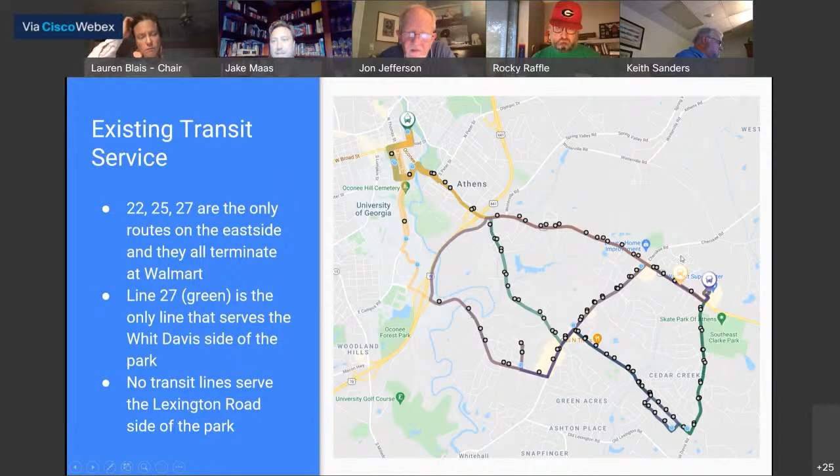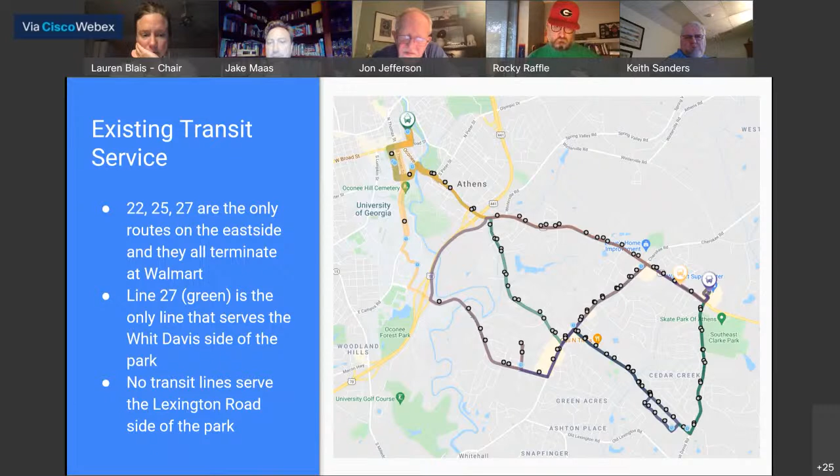So these are the current existing transit services. You can see that these are the ends of the lines. One is here on Lexington, one is at the Walmart. The green line and this purple line are both at the Walmart. Line 27, the green line, is the only line that serves the Whit-Davis side of the park, and that comes every 30 minutes. No transit lines serve the Lexington Road side of the park.

Which of course is also an important polling place for the east side, it's where I cast my votes. We are also proposing a roundabout, an improved facility at the corner of Lexington Road and the tennis court entrance. We'll talk a little bit more about that later, but that's the second element, because right now that intersection cannot accommodate buses. It's a 55-mile-an-hour speed limit, buses would be turning into that traffic, and it doesn't have the width to accommodate buses safely.

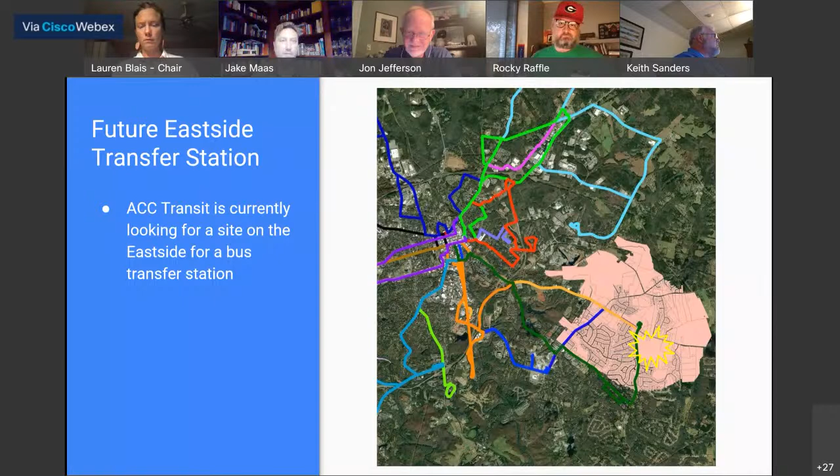And so transit, using Southeast Park as a hub for East Side transit, would allow expansion into the East Side neighborhoods and rural areas, as well as expanded service to all of the facilities that are destinations on the East Side, including a potential future library and other amenities in Southeast Athens.

This project would close the equity gap by increasing accessibility to people of all abilities and backgrounds. People come from all around to this park, yet many people in our own community have limited access. It would also provide access to the skate park, and utilizing it as a bus transfer station would create opportunities for more neighborhood use of transit, more transit routes.

It supports 13 of the 14 project criteria. Obviously, the main one we're looking at is increased usage of the transit system and better pedestrian access to transit facilities. Alternative transportation is an element, and then, of course, all of the environmental impacts you get from more people riding transit as opposed to driving.

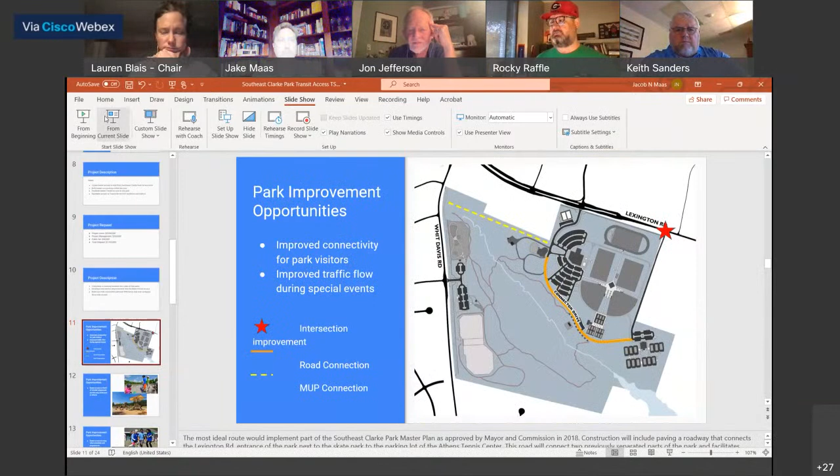Yes, it is. So I think you answered my question already. Would there be opportunity to make more of a connection to the tennis center for the purpose of voting? I serve on our board of elections, so that's something that's important to me, actually.

Daniel, what are your thoughts? Absolutely. Aside from just being able to park at that main left parking lot in the center of the park, the main Lexington side, and then there's the tennis center parking lot, and then there's the right Whit Davis side. So there's kind of three main entrances to this park that are all separated from each other. So aside from bringing access, having additional parking, there's the increased access via transit.

Right now, transit can't really come to the park because they can't get back out on Lexington Road. And that's why the intersection improvement is so important, so that the buses can get back out, and then that can kind of be here. So you could have a bus stop at the main part of the park, and then you could have a bus stop at the tennis center.

I'd like to see some way for the bus to get closer to the tennis center if that's an option, but thank you.

Yeah, the bus would travel down that orange line that you see, and so they would actually go right in front of the tennis center, and then exit by that church there on the right, out to Lexington. And the yellow line is the multi-use path. That would provide pedestrian access between the two halves of the park - smooth, level pedestrian access. Not everyone likes to hike through the woods.

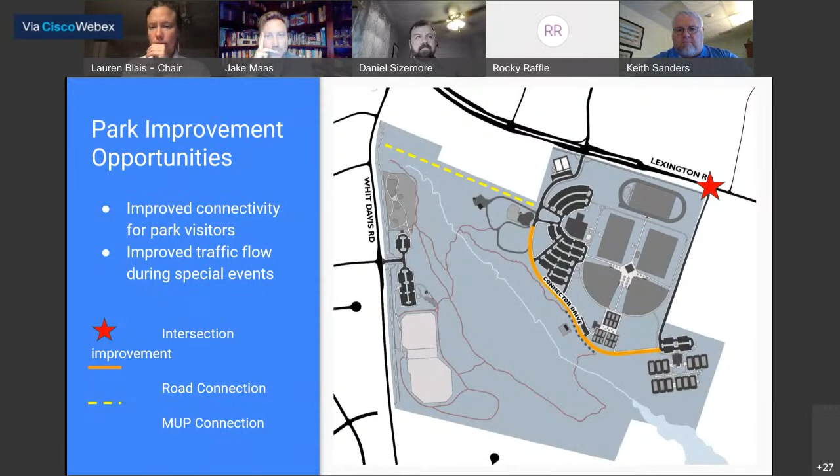Daryl. Yes, I had a question. You was talking about Walmart, and you saying the unsafety of the patrons there. I'm asking, what is Walmart doing to make sure that the patrons are safe coming through to get to these areas? If they coming over to the store, because I know it's a lot of people in them areas, mostly walk or catch the bus to the store. So what is Walmart doing to ensure safety on their property, that nothing happens to those people by the time they get on their bus or go across the street or to the park? You understand what I'm saying?

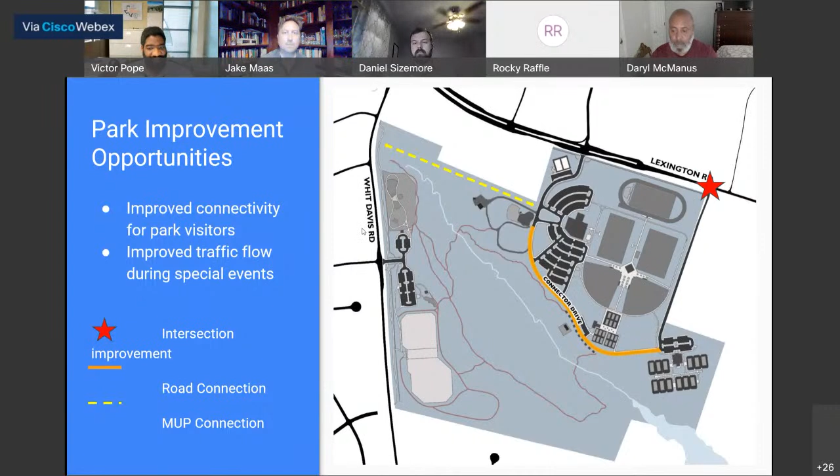Yeah, Vic, do you think you could speak to that? Sure, yes sir, that is a great question, and that's one of the reasons why we're looking to possibly relocate that bus stop from the current position, if space is available elsewhere within the property occupied by Walmart. Generally, parking lots incur a lot of pedestrian conflicts just because you have people parking their vehicles and exiting the vehicles and heading into the store, and you also have people who are reversing their cars to exit the facility as well. And just the general nature of that activity creates great possibility for pedestrian vehicle conflicts, increasing the likelihood for injury to pedestrians who are trying to use transit facilities.

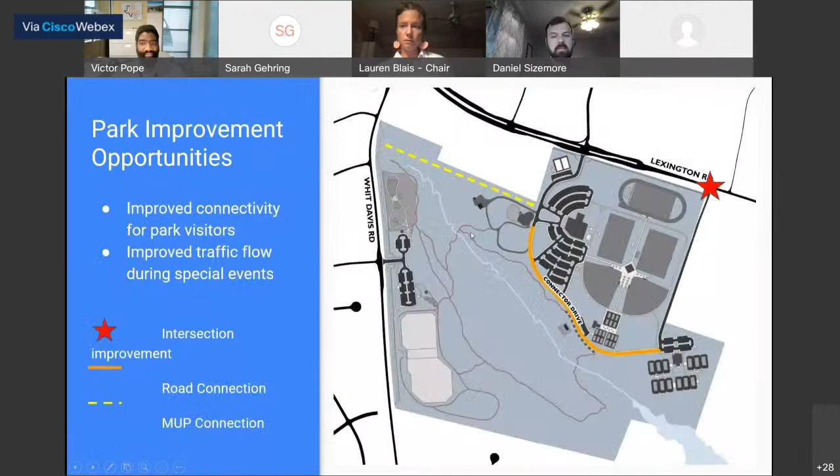But as far as the map goes, if you go down to the one with the aerial background and all the different colored bus lines, that map is literally a screenshot from the public input materials for when they were looking at site selection. One of the major benefits with this site for that transfer station being here is you don't have to acquire land, which is one of the main concerns. You know, is the landowner going to be okay with selling, or how do you pick a site for that kind of thing?

Okay, thank you. All right, we have just under a minute, so Dawn and then Teresa quickly after her.

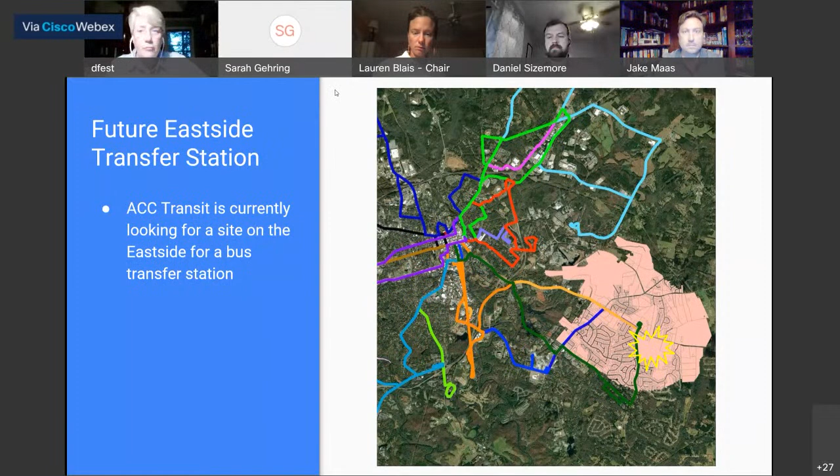Thanks, I think this is a great project. I live across the street, so obviously I'm interested. I guess I'm curious about deciding the roundabout. I don't know how you go about deciding this, but it seems like a roundabout is very expensive compared to if you put a light there at what I call the tennis entrance exit, where the church is. Would that not be a less expensive way to start this transit location?

Absolutely, I'll take that one since it's transportation based. The roundabout idea, that's a GDOT roadway, so it has to fall within certain counts to justify a traffic signal. That being said, I think if we were paying for it fully with local dollars, you're much more likely to see them say we could do that. The roundabout idea was, hopefully, you know, I think GDOT in general really likes those a lot more. It also creates a kind of gateway entrance into Athens, and there's some traffic calming that comes along with it. But the roundabout was priced out at about 3.5 million, and the signal for that location, if I remember correctly, was 1.2.

So that would cut down in costs. And we do plan on putting forth an alternative that you guys can take a look at, which would include downgrading that to a signal.

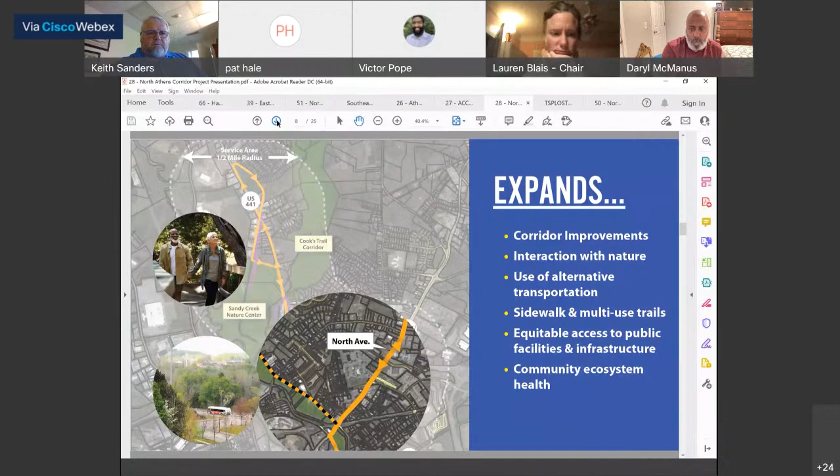The multimodal transit ride, hike, and park facility is designed to be convenient for commuters coming into Athens from outside areas, as well as residents who live along the north side corridor and may find issues finding parking in the downtown area, on campus, or elsewhere where they may seek employment or enjoy social activities.

This meets the strategic goals brought forth by providing or extending transit service to unserved areas throughout Athens.

Provide equitable access to Athens-Clarke County parks and amenities.

Connect North Athens residents with Cook's Trail through the use of multi-use pathways and connections to the Athens transit system.

Promote sustainable living through the deployment of zero-emission vehicles and renewable building materials in the multi-use pathways, and also reducing the potential greenhouse gas emissions from commuter traffic.

It reduces travel times spent in vehicles when entering or exiting Athens-Clarke County through the north side, through the use of transit and multi-use pathways. It also subsequently reduces roadway infrastructure maintenance needed for those roads, which is a further cost savings.

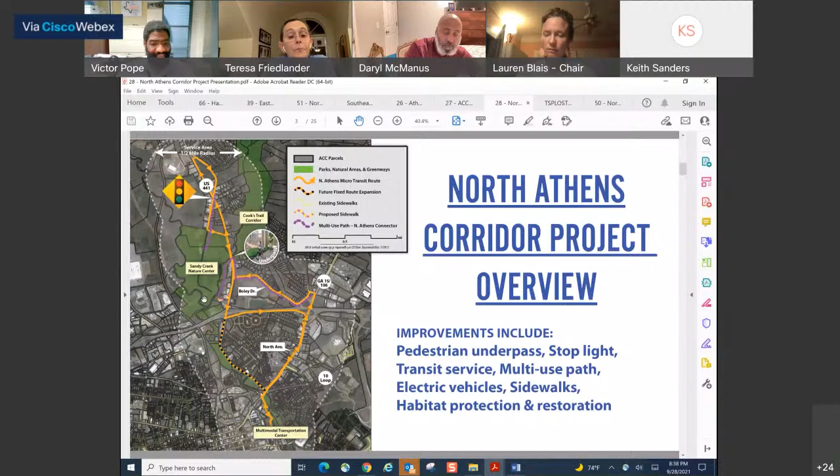Okay, all right, that makes sense. Well, that was my most important question for you. Thank you. You're welcome. Pretty cool. Additional questions? Jennifer?

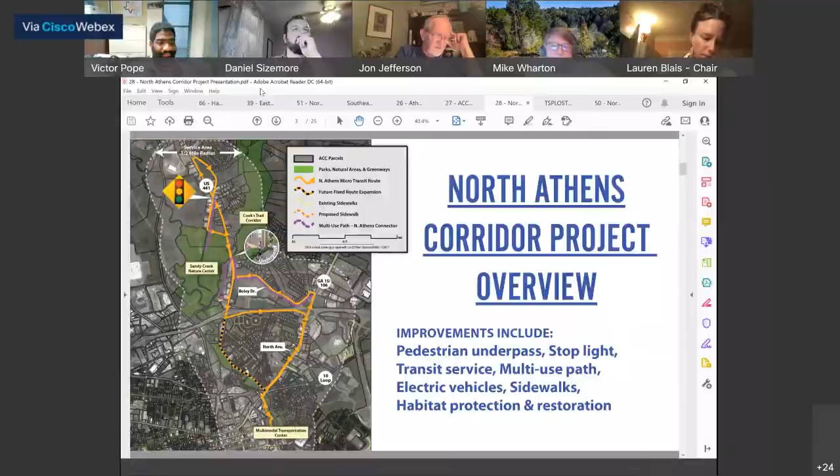So there are 2 other TSPLOST projects mentioned in concert with this project. You mentioned Cook's Trail, which we heard from the Greenway Commission about last night. Cook's Trail exists, but it's under disrepair, or needs SPLOST funding or something to repair it. And then you also mentioned North Avenue, which we have put in a RAISE grant for, and there's also a separate TSPLOST project for that too. Is that right, Daniel?

It's for the bridge itself, not for the multi-use path. But the RAISE grant, we'll find out in November whether we were awarded that grant or not. That's a different pot, right? Yes, that's a federal infrastructure grant from the U.S. Department of Transportation.

The significance of that for the committee is that's $25 million that would basically redo all of North Avenue, put in a multi-use path, replace 2 bridges, one along the North Oconee, and then that double bridge over the loop that doesn't have any sidewalks. So that's kind of what it sounds like this project is tying into. To be clear, it's not replacing the loop bridge, it would build an additional pedestrian bridge over the loop. And then it ties a multi-use path from there to the existing multi-use trail, which there's a small segment on the north side of this, but this Boley Drive would come in at the end of that project and they could connect up directly.

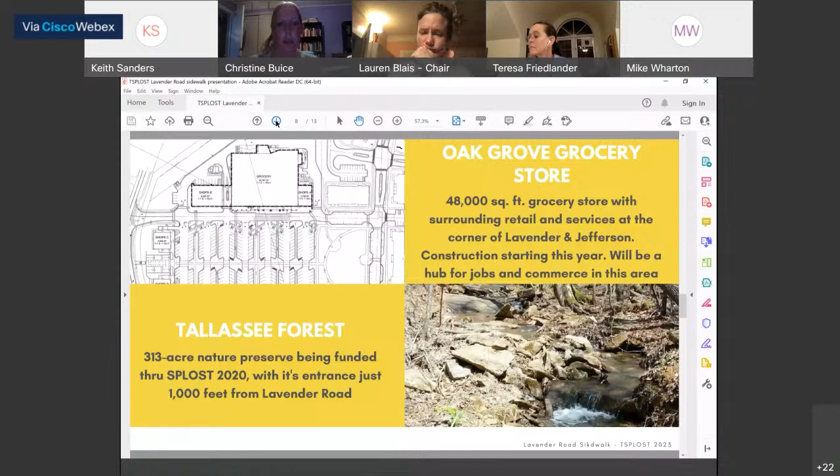This is talking more about the Tallassee Road Connector and the multi-use trail. This will also allow for expansion to the Eastside transfer station, if they decide to choose that location, but this is all looking forward still. Next slide, please.

So the many benefits speak to the triple bottom line - the equity, equal opportunity for transportation in terms of jobs. Part of my job is addressing persistent poverty in Athens, generational poverty. We're trying to get people employed, but it's a chicken and egg thing. They don't have reliable transportation, so they can't get to a job, can't hold a job down. They don't have a job, so they can't pay for a car, car insurance, or a tag. This expansion of transportation and connectivity will help bridge that gap as well.

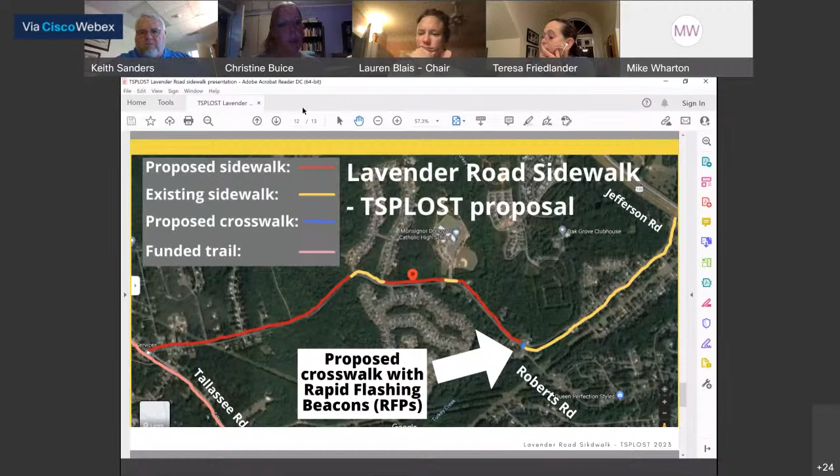Did I make it under 10 minutes, or did I go over? You went a minute over. That's fine, who's counting? I'm sorry. Thank you very much.